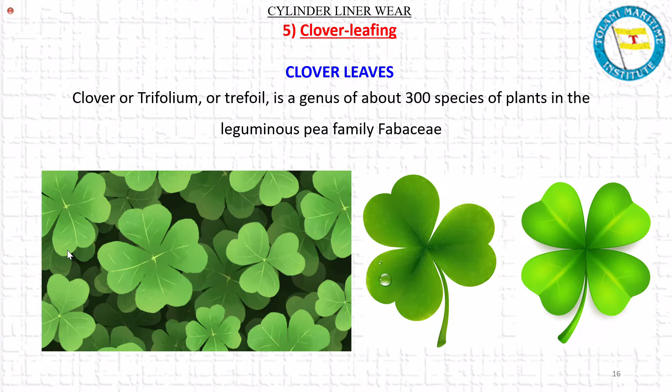Is that understood? Yes, sir. So clover leafing, when it is coming, please try to explain with the help of diagram. Please don't just make it like that. Please try to use the diagram, and both the diagrams should be there. There should be a top view which should be used. There should be a side view which should be used. And the way I made the bands and all and explained to you, please make that.

Here also, this left side figure also, you can see some bands are shown. But if these bands are not shown with respect to the quill position, then it becomes difficult. If the bands are shown with respect to the quill position, and with the respect to this wave cut patterns and all, it becomes very easy to understand. और उसको correlate करो इसके साथ में. Try to correlate it with the top view, cross-sectional view, top view. And here you should have a side view. Both the views must be made to explain the clover leafing.

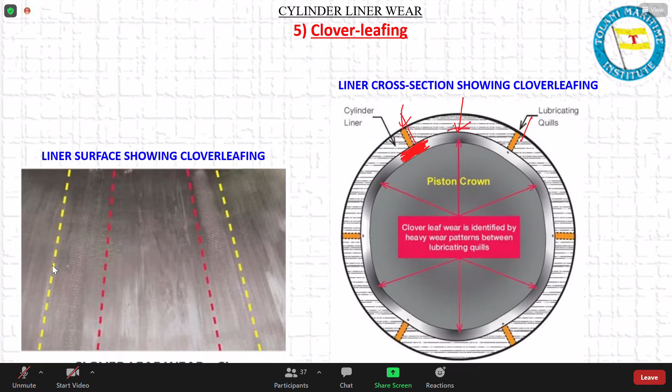Please do not explain only in words. Always make use of figure. But figure में अगर आपने ये गलती कर दी कि आपने quill को यहाँ बना दिया, और ये बोल दिया कि quill की middle position है, तो you have gone 100% wrong. Your logic has gone 100% wrong, and you'll get 0 marks for the same. Because जहाँ पे आपका liner का wear diameter is less, means wear is less, वो quill का position है. In between the two quill position, your liner diameter has increased. So this is what you need to keep it in mind very clearly.

Yes, sir. Okay. Now let's talk about the liner wear rate and liner wear limits. This is a very commonly asked question, especially when you go for your MEO class 4 exams, or when there is a question on liner wear. One of these questions, or both the questions, can be asked along with the wear of the liner.

Excuse me, sir. How we can reduce the clover leafing, sir? Is there any method to reduce clover leafing? Yes, that's a very good question. So let me share my whiteboard and then write down over there so that you can note down those points. So clover leafing can be reduced.

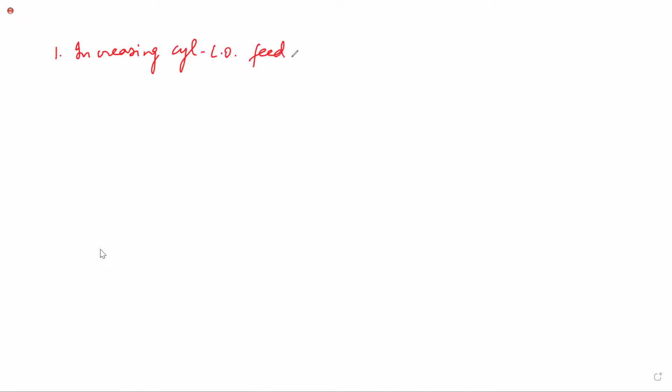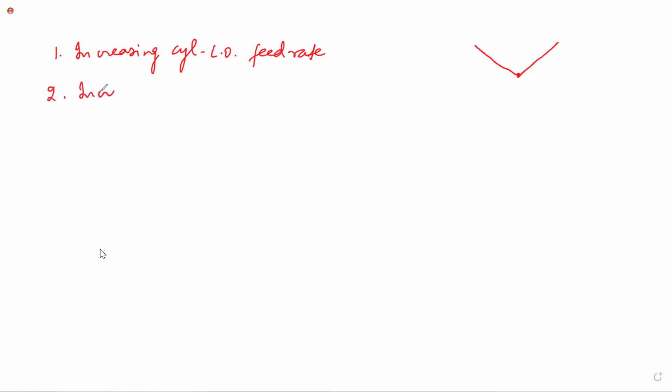1, increasing cylinder lube oil feed rate. So when you're increasing the cylinder lube oil flow rate, the oil which is able to reach the bottom of these grooves, that will be still having sufficient alkalinity, correct? That is one thing. Second thing is increasing BN value of the oil.

So when you have increased the BN value, say earlier you were using a 50 BN value, वो यहाँ पहुंचते पहुंचते 30 हो रहा था, so now you increase it to 70. So here it is reaching 50 or 60, and that is good enough to neutralize the acids and all. I'm just taking all arbitrary figures. So this is another way you can increase that.

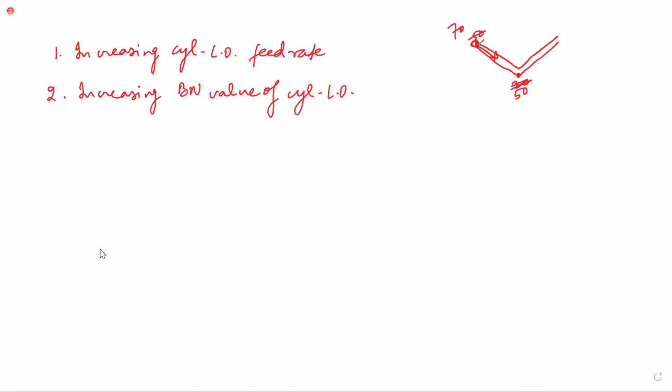Then one more thing which you need to see is कि ये जो आपका wave cut pattern है cylinder liner में, two more things which you need to see actually. Is the lube oil flowing out from the lube oil quill without obstruction? What happens sometimes, the cylinder liner gets worn out and this quill, the hole through which the oil drains out, gets partially covered. Also the wave cut groove gets partially filled up because of the wear that is taking place, and this groove does not remain of sufficient depth. So iska depth khatam ho gaya groove ka, that it is not able to retain sufficient quantity of oil.

When it is not able to retain sufficient quantity of oil, most of the oil which is getting poured out of the quill tends to fall out nearby the quill only. Less amount of oil is reaching the end of the grooves, because the depth of the groove has reduced. So this is also another thing which must be noticed. See whether the groove has worn out and the groove depth has decreased. These are some of the points which will help you in reducing the clover leafing.

Okay. Then coming to the cylinder liner wear rate. हम wear की बात नहीं कर रहे हैं, पहले हम wear rate की बात कर रहे हैं. Wear rate is calculated per 1000 hours usually. कितना मिलीमीटर wear हो गया लाइनर में per 1000 hours? Cylinder liner wear rate is expressed in millimeter per 1000 hours. Okay, the rate of wear will vary over the life of the liner. There is something called a bathtub curve, which most machineries follow. That is sometimes called a bathtub curve.

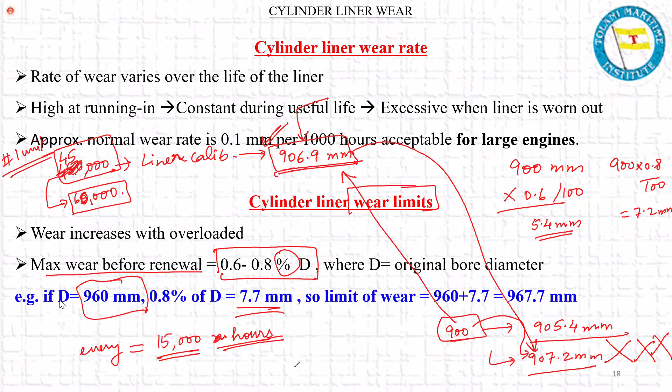Yes or no? No, sir. Why no? And if somebody is saying yes, why yes? Sir, after 15,000 hours, if we take the average wear rate as 0.1 mm per thousand hours, then it will be 1.5 mm. Let me write down 0.1 mm per 1,000 hours multiplied by 15,000 hours. The 1,000 cancels out and it is coming to 1.5 mm. 1.5 mm added to 906.9 comes to 908.4, and we are far exceeding our highest limit of 907.2 mm.

Very good, Anirudh. Excellent. I think everybody has understood what I mean to say. Yes, sir.

आया? इसीलिए जब आप जहाज पे होंगे, when you are there on board, please apply these logics. मैं आपको practical समझा रहा हूँ. देखो, I am teaching you in a theory class. I am teaching you the practical effect, and many times the engineers make this mistake.

वो क्या करते हैं? उन्होंने measure किया अभी, and without thinking कि मुझे 15,000 घंटे के बाद लाइनर का calibration करना है. I'm not going to open up the unit in next 10,000 hours for changing the piston. Forget about the liner calibration. And engineer decides नहीं, अभी तो वो limit में will continue, and it's a fatal decision. Let me tell you, because if you continue to use a badly worn out liner, it may crack, it may give you blow-by, it may cause the collapse of the piston rings, it may cause many more problems.

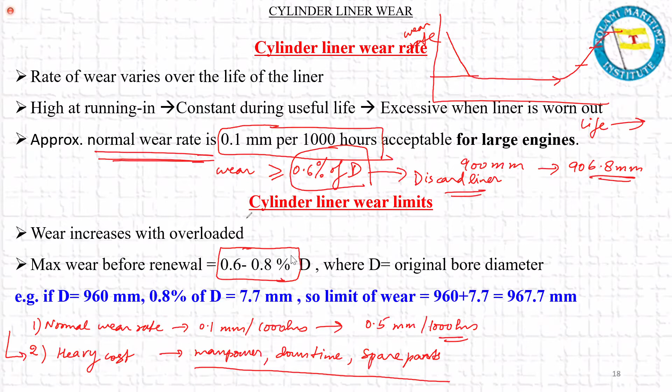तो यहां तक तो ये 0.1 चल रहा है, ये 0.1 है, बट यहाँ पे क्या हो गया, 0.2 हो गया, यहाँ पे 0.3 हो गया, यहाँ पे 0.4 हो गया. तो आपका वेयर रेट ड्रास्टिकली इंक्रीज करने लग गया जैसे ही वो 0.6% ऑफ डायमीटर को क्रॉस कर गया. बट ये जो 0.6 है, ये तो एक जेनरिक अप्रोच है. एक्चुअल आपके मैन्युफैक्चरर मेकर ने क्या बोला है, प्लीज ट्राई टू स्टिक टू दैट. इज दैट वेरी क्लियर टू एवरीबडी?

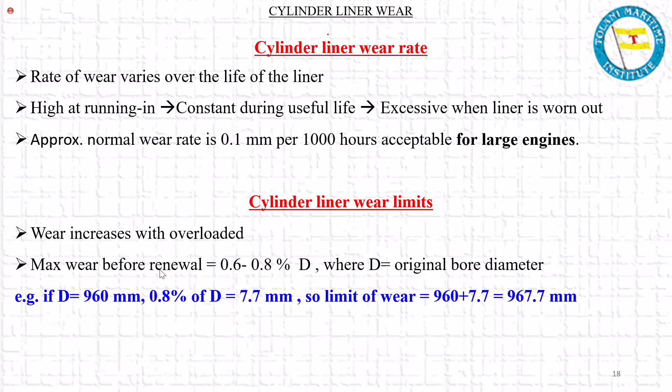Yes, sir. Yes. Okay, so I hope that you have noted down some of these things also, because these have got a lot of practical significance. ये खाली थ्योरी नहीं है, ये थ्योरी को अप्लाई करना है. ये देखिए, ये बात टब कर्व की बात में कर रहा था, लाइनर वेयर रेट वर्सेस टाइम कर्व. ठीक है, तो यहाँ पे आपका रनिंग इन हो रहा है शुरू में, then you have the steady wear rate for very very long time.

तो ये आपका छोटा पीरियड है. एक्चुअली ये बहुत बड़ा पीरियड नहीं होता है. ओके, एंड देन उसके बाद में आप देखेंगे कि यू विल फाइंड इट इज वेरी स्टीप. ये इतना स्टीप नहीं होता, दिस इज नॉट सो स्टीप, बट दिस इज वेरी स्टीप. तो ये आपका अगर 0.1 था यहाँ पे, ये 0.2 हो गया, 0.3 हो गया, 0.4 हो गया, लाइक दैट इट कंटिन्यूस एंड इट गोस अप ड्रास्टिकली. और ये तो वेयर रेट था.

और ये एक्चुअल वेयर को अगर मैं प्लॉट करूं विद टाइम, actual wear means liner diameter, actual diameter minus original diameter, इसको बोलते हैं wear is equal to the actual wear. तो जो actual wear को अगर हम प्लॉट करेंगे तो initially the wear will be high, फिर the wear will become lesser with time, not very steep, but at the end the curve will become very steep. The curve will become very steep.

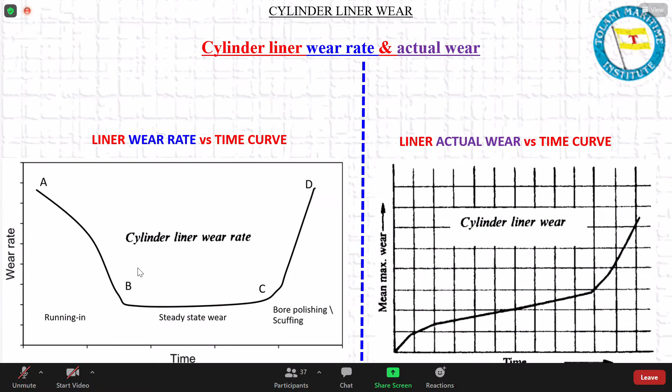Yes, sir. हाँ, तो ये आपका ट्रबल शूटिंग है फोरकास्टिंग के लिए कि अभी लाइनर का हाउ मच इफेक्टिव लाइफ इज रिमेनिंग, क्या हमें लाइनर अभी रिप्लेस करना चाहिए, नहीं करना चाहिए, तो क्या डू वी हैव अ स्पेयर लाइनर, सपोज वी हैव स्पेयर लाइनर बिकॉज दिस आई मे बी एक्सपेक्टिंग कि इन अनदर ईयर माय लाइनर इज ड्यू फॉर रिप्लेसमेंट, so what I have one spare liner, what I'll do, I'll raise a requisition, I'll raise an indent for another new liner to be purchased and procured and supplied to the ship in another 1 year.

And once I get that another new liner, I'll immediately in the next opportunity in the next port, I'll replace this liner. So this is how the things work, and that's why you need to see the trends, you need to see the graph, and you need to record. Maintenance is very important on board, and you need to be actually sometimes plotting the things and trying to come to some conclusion.

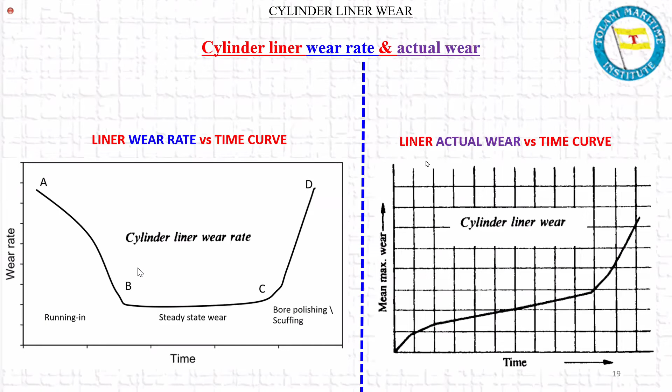Okay. Excuse me, sir. Yes. Sir, do you have to replace all the liners at a time? Because running hour is the same for all. No, you don't have to replace all the liners at the same point of time. The reason is that first of all, yes, when you take the delivery of the ship new, all of them are in the same condition.

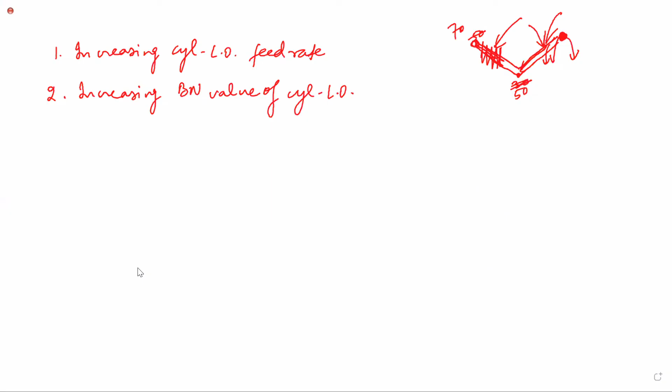But over a period of time, I'll tell you what happens. Over a period of time, there is a staggering in the plant maintenance system. Staggering word जो है एक बहुत बड़ा word है और बहुत commonly use होगा. Staggering. The schedule staggering is done. Schedule staggering is done. So अभी आपको मान लीजिए 15,000 hours में यूनिट को खोलना है, तो आप यूनिट नंबर 1 को क्या करेंगे, शुरू करेंगे. Maybe you can start. एक मिनट.

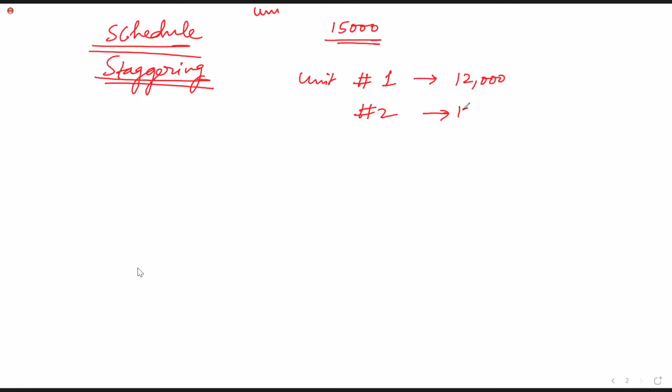So unit number one, you'll start opening say at 12,000 running hours. Unit number 2, you will see that yes, it has to be done at 13,000, another at 14,000, like this. And some of them you may exceed also because you can't open all the units at 15,000 running hours.

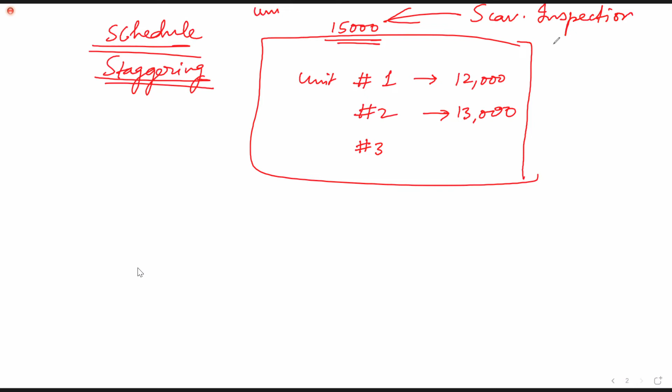But the unit is not opened just like that. Before opening it, a scavenge inspection is done. Scavenge inspection is a very powerful tool. This tells you when you open up the unit at 15,000 running hours.

Yes? Sir, in between your voice was not coming. After you said that before opening we have to do scavenge inspection. Okay. So scavenge inspection, is my voice coming clear now? Yes, sir. Just a minute. Again, it is showing unstable connection.

So scavenge inspection is a very powerful tool. That's what I am saying. And it is not that if 15,000 running hours is written in the plant maintenance system, then we must open up the unit at 15,000 hours. If the chief engineer can justify, based on the scavenge inspection, that the unit was performing well, he has the photographic, videographic, and measurement based evidence that he has recorded. Then he can always defer this 15,000 to 16,000 and 17,000 also. Okay, he can defer that.

So he can defer this routine, not inspection, but maintenance or opening up of the unit. So the final effect, what you will find is unit number 1 opens at 12,000 running hours, unit number 2 at 13,000 running hours, unit number 3 at 14,000 running hours. Unit number 4, like this, you have staggered the schedule, and up till 20,000 running hours, you continue to open up the units, and even more. Because you have done this, every time you are doing the scavenge inspection, if you find that a particular unit requires more attention, you can open that unit up first.

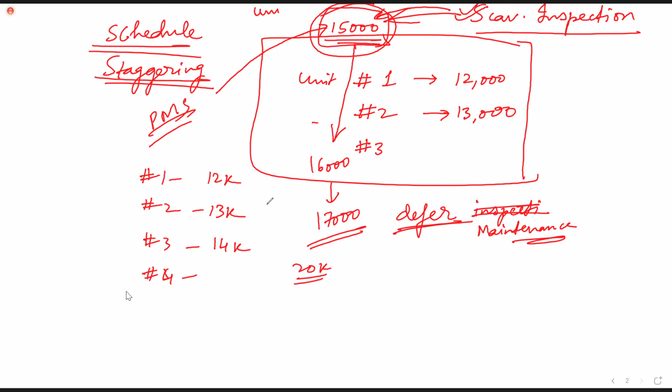So once these units get staggered, you know that now 12,000 plus 15,000 hours will be added, and next time you have to open up this unit at 27,000 running hours, and the last unit which was opened up at 20,000 plus 15,000, it needs to be opened up at 35,000 running hours. And I have just given you a very arbitrary example. So for this, the maintenance schedule is staggered, so all the things will not fall due at the same point of time. That is point number 1.

Point number 2, all the units never behave the same way. Like all fingers in your hand, they don't behave the same way. They are not of the same size. They don't work the same way. So like this, all units, in spite of being identical in the beginning, and the maker having designed them identically, they do not continue to operate the same way for the entire life. Somewhere the combustion is better, somewhere it is slightly less better, somewhere it is poor. And like this, the condition continues to get altered, and so is the wear condition, and other conditions inside the cylinder continue to be different. Is that clear?

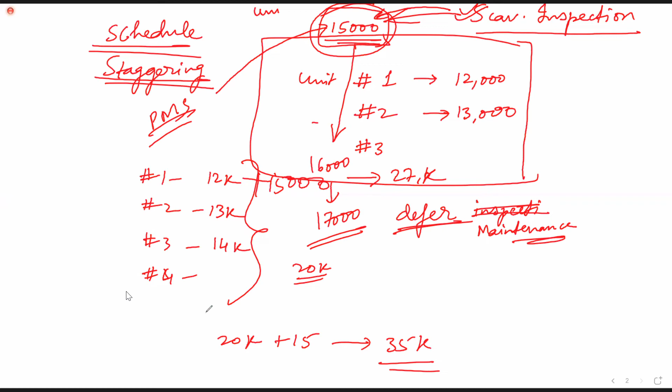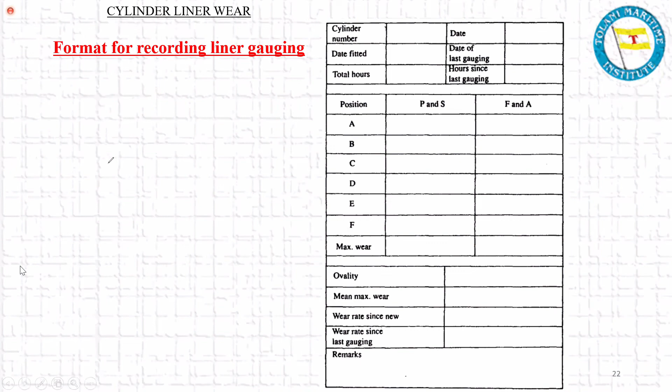We will be maintaining this record, will be measuring it. And for measurement, the measurements are done at A, B, C, D, E, F, G, H, like that, so many number of points. And these points are decided on the basis of a template.